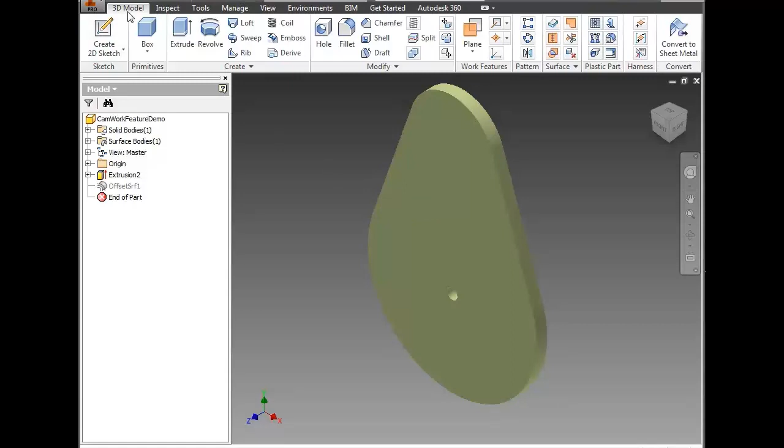First, we are going to add a mid-plane work plane between the two flat faces of your CAM. In the 3D Model tab, under the Work Features panel, click the drop-down menu for Plane. Select Mid-Plane between two parallel planes.

Then I need to indicate the two planes that I want to include and have a plane put in the middle. A work plane that is parallel to and midway between the two faces should appear.

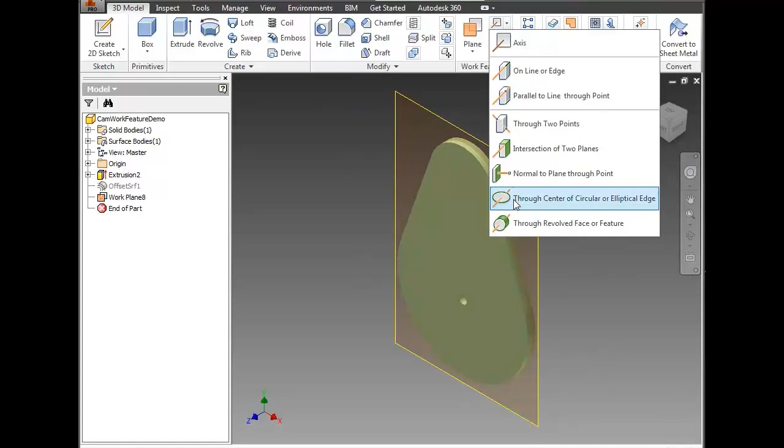Next, add a work axis through the center of the hole. Again, from the Work Features panel, display the drop-down menu for Axis. Choose through center of a circular or elliptical edge. Now I have two circular edges that I can use. It does not matter which face of your CAM you choose the edge on.

Select the edge of the hole on one flat face so that an axis appears through the center of the hole. You can extend the axis indicator to make it more visible in the graphics window.

Finally, we need to add one more work plane. We need a work plane that cuts through the CAM that is orthogonal or perpendicular to this work plane, the midplane, and passes through the axis of symmetry. In order to do that, we need to choose a plane to which we want to be parallel and a point through which we want the work plane to pass.

First, create a work point at the intersection of the work axis through the hole and one of the flat faces of the CAM. Again, from the Work Features panel, display the drop-down menu for Point. Choose Intersection of a Plane / Surface and Line.

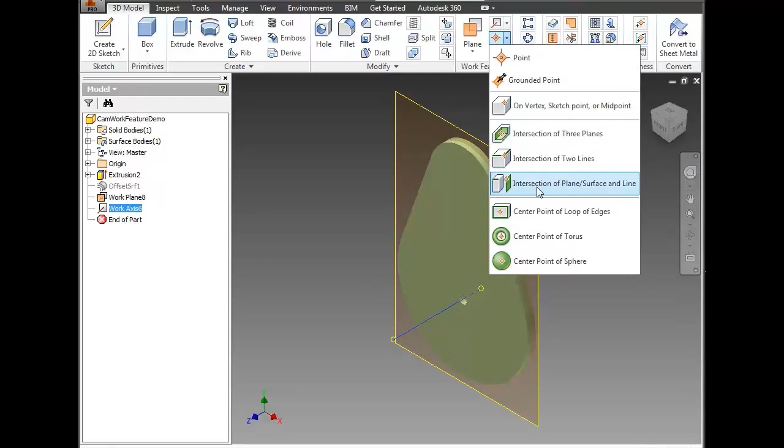Then select one of the flat faces of the CAM. It again does not matter which flat face of your CAM you choose. You'll see if you zoom in, there is actually a work point inserted there.

Now I need to choose a plane from which I want my new plane to be parallel. If you have a plane of symmetry for your CAM, you want to choose a plane that is parallel to that plane of symmetry. In order to look at the reference plane, you can expand the Origin folder in the browser and hover over each of the three reference planes here.

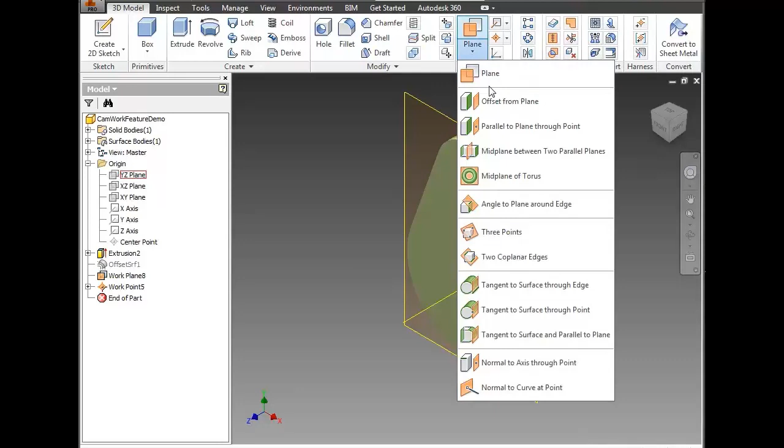Choose the one that will be parallel to the plane you are going to create. In this case, I'm going to choose the YZ plane. Let's go ahead and create that. Choose Parallel to Plane through Point from the Work Features menu.

Then, by hovering over the reference planes in the browser, choose the appropriate reference plane. Again, in this case, we will choose the YZ plane. Then select the newly created work point. A new work plane should appear.

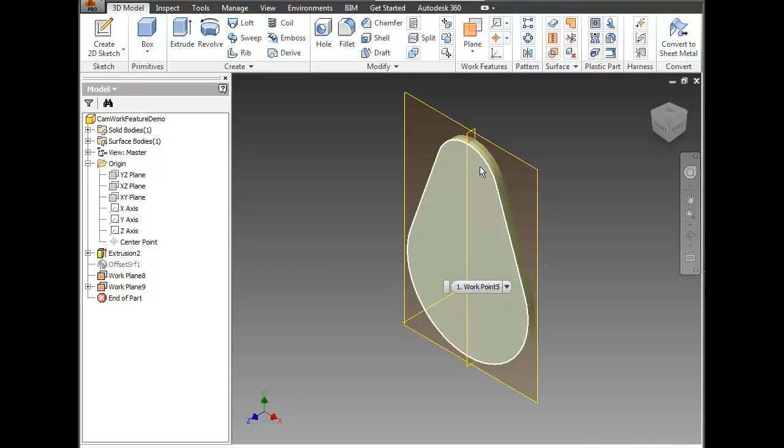You may adjust the size of the representation of the work plane in the graphics window to make it easier to identify. Technically, it is important to remember this work plane, as do all work planes, extends infinitely in two directions. These work features will help you properly constrain your CAM in the CAM assembly.

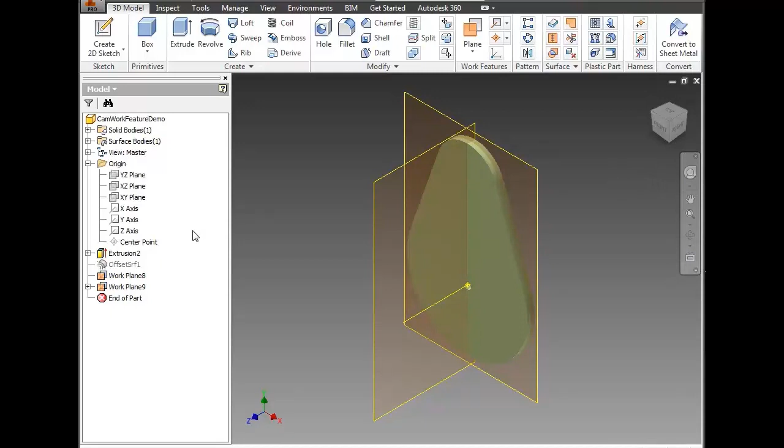Note that you may toggle the visibility of any work feature on and off by right-clicking on the feature, either in the browser or in the graphics window, and choosing Visibility.